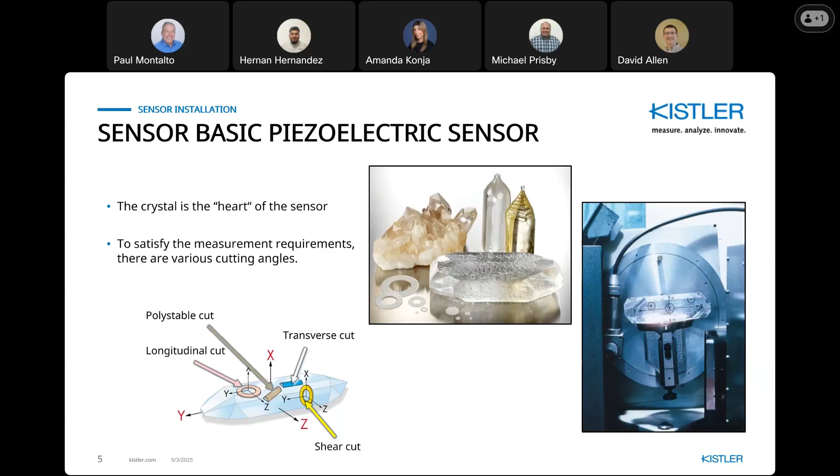Let's start at the beginning with the structure of the sensors. Kistler is a sensor company, and we basically use piezo technology, which involves forming sensors from crystals by cutting different shapes from the crystal in order to get the desired properties of output from the sensor. Essentially, when crystals have force applied to them, they give off an electrical charge naturally, and it's linear to the amount of force being applied to them. So it's a natural born sensor material, quite honestly. We'll see more of how it works in just a second here.

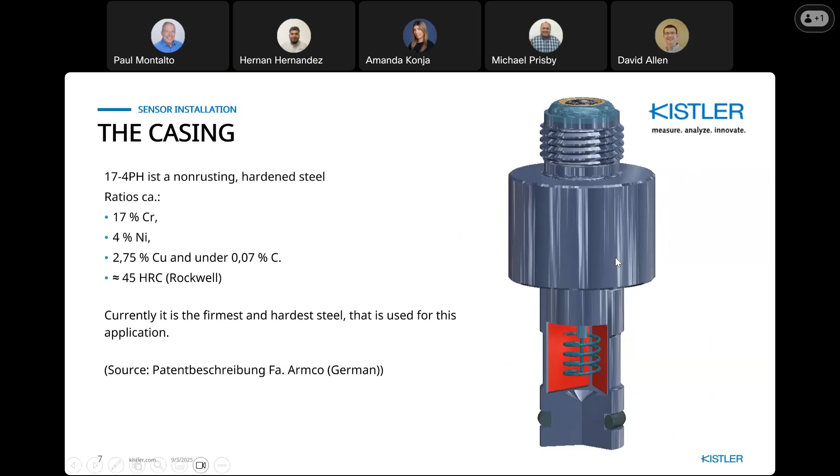The basic frame or cylinder of the sensor is high strength steel, such that it protects the crystals from any kind of damage. Inside the sensor, looking at the cross section, you'll see there is no electronics. You just have the crystal cartridge and insulating details to allow that electrical charge to be sent to the connection cable, which will eventually go to an amplifier and a monitor screen so that you can see the pressure output.

Essentially, the sensor is mounted in the cavity and senses the plastic flow as the plastic pushes against the tip of the sensor during the filling process. As we know, or may not realize, the filling process in most cavities is generally less than a couple seconds. So this plastic is flowing and this pressure is being sensed almost instantaneously. That's the basic construction of the sensor.

The types of sensors we have to look at industry-wide are direct sensors, which are mounted directly in the cavity; indirect sensors, which are mounted typically behind an ejector pin or a stationary pin; or a third category, contactless sensors. This is a sensor that's essentially bottomed out into the backside of the cavity, using the cavity steel as a transmission source to get the plastic pressure felt onto the tip of the sensor.

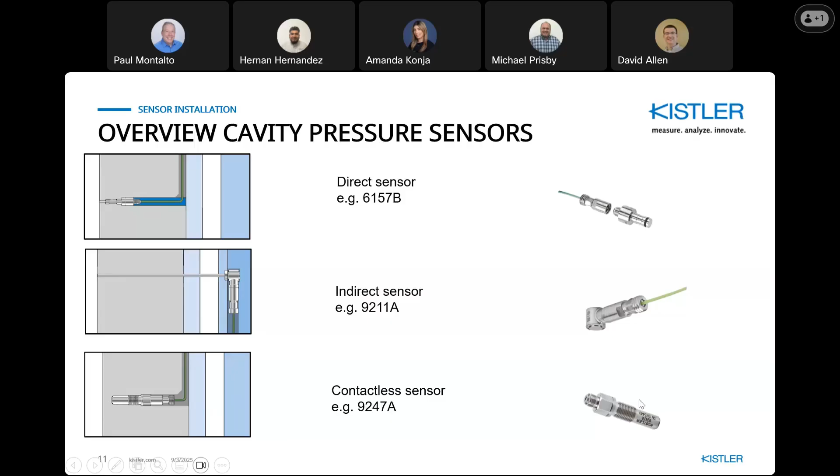Each type of sensor has some advantages and disadvantages. The primary advantage of the direct mount is that it's right at the source of the plastic pressure. One of the disadvantages is that it does leave a witness mark similar to an ejector pin on the part. In the event that that's something we have to work around, we have some other options.

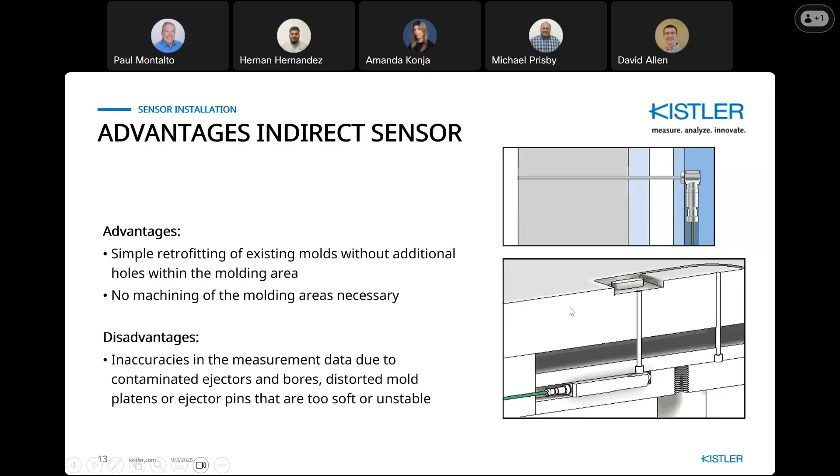The indirect sensor mounts behind an ejector pin, as I described. It generally is very easy to retrofit into an existing mold, and that's why these are extremely popular when we're looking at upgrading existing factories to get them into modern molding.

Quite an innovative design here is this contact-free sensor, where, if you have a lens or any kind of surface that cannot have any blemishes, or is so small that a sensor would not fit on its surface, this contactless sensor is great for micro molding, silicone, or even lenses where imperfections are not permitted by witness marks of any kind of pin.

So just a recap of the different types of sensors. In addition to sensing pressure, we could also add a thermocouple to the tip of these designs, making it a pressure and temperature combination sensor.

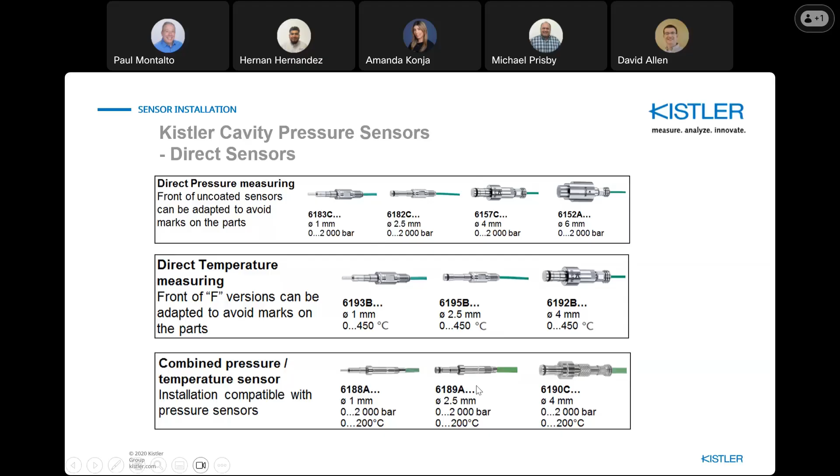Coax options are also available in the event that the cabling is routed outside of the mold.

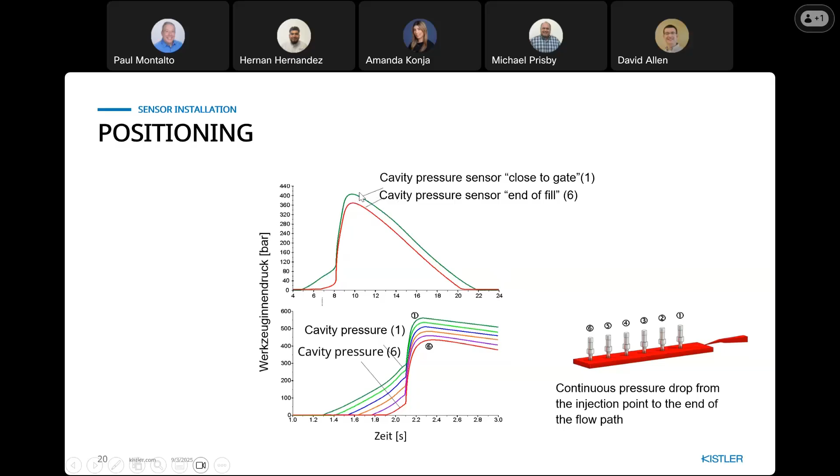Where we put the sensor in the mold will determine the type of graph you will get. The closer to the gate, you'll see a higher pressure, essentially a filling portion of the graph, versus at the end of fill, represented here in the red line, which is a smaller pressure due to the fact that the plastic pressure is actually dropping between the filling point and the end point, because plastic is always curing as it's flowing in, so you're losing pressure as it's curing. Even though it's only 1 to 2 seconds, this is an amount of pressure that's also being lost.

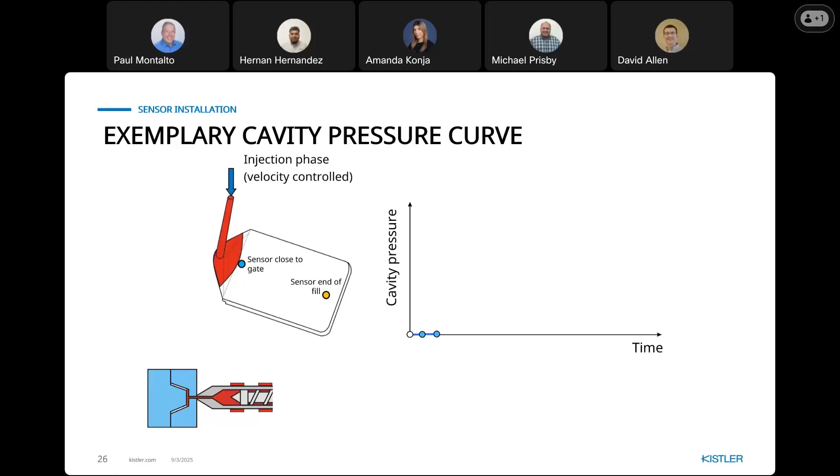Just a bit of correlation of how plastic flows into the cavity and the associated graph. As soon as plastic touches the sensor, you'll get movement on the graph, and as it's filling, you'll get a constant upward curve.

The end of fill sensor here, noted in yellow, you just get a little mark that the pressure is there. You don't actually get any pressure until you get a full cavity. As soon as the cavity is full, that's when the pressure spikes up, because there's nowhere else for the plastic to flow but against the walls of the cavity, thus giving you the spike in pressure.

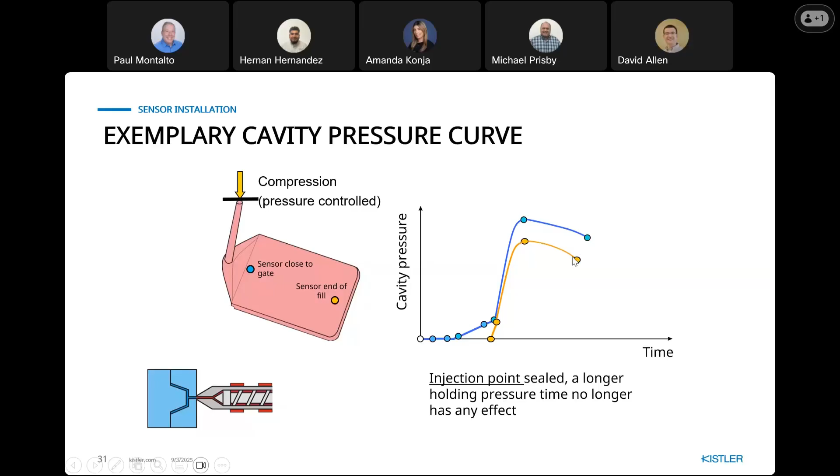Further along the timeline, you see the graphs will start to descend. That's due to the plastic curing. And as the plastic cures, it shrinks away from the sensor, it shrinks away from the walls of the plastic, thus giving you the cooling rate of how the part is actually in its cure stage.

And finally, as the mold opens, the pressure is essentially back to nominal before the process started. So using this graph, we can verify and correlate to dimensional results and capability studies, and the process monitor system can monitor independently from the molding machine the different process settings.

Just another comparison, showing you the difference between post-gate and end of fill. Post-gate sensors are really good for controlling different aspects of the process because it's closer to the filling point. End of fill sensors are really good for monitoring part quality, as it's specifically in line with correlation to the cooling process and the pack and hold process, which allows for dimensional stability to be maintained.

As we talked a little bit about pressure loss between the injection machine, here represented at the top graph, these are the different steps of pressure due to the plastic curing as it's being pushed through the mold and essentially setting up. This is a typical graph you'd see for the different types of pressures, and this is why it's much better to rely on cavity pressure than the molding machine's injection pressure graphs.

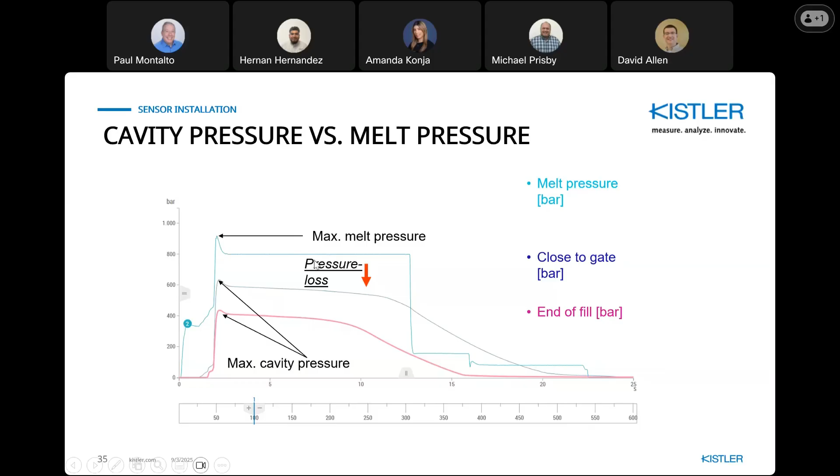The process monitor, the Comoneo, is what these sensors are connected to, and it comes in a version of 8-channel, 16, and 32 channels. So you can have a variety of different connections to this monitor system.

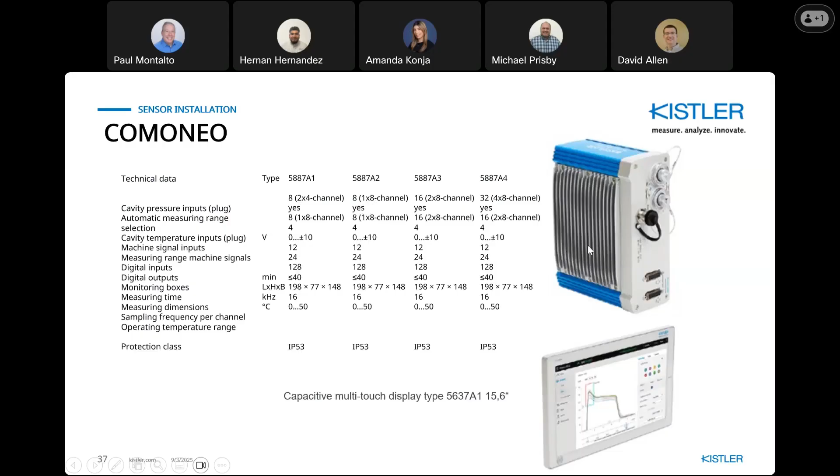This is kind of a busy screen, but it's showing all the different influences, or all the different signals that can be captured and recorded on the Comoneo for process integrity. So you can have history of how it's been running, or troubleshooting, or process development.

And you could see here briefly, the types of curves that are being produced from the cavity pressure sensors. You have the molding machine input can be graphed. You can have the temperature of the cavities. You get a whole snapshot of the entire cycle.

And in this case, you have a timeline on the bottom. It looks like it's 0 to 13 seconds. And so you have a history being recorded here.

Again the correlation of the graph to the different types of product defects that you may want to prevent. With the monitoring system, you can choose to select what's going to be a good part and bad part before the molds even open.

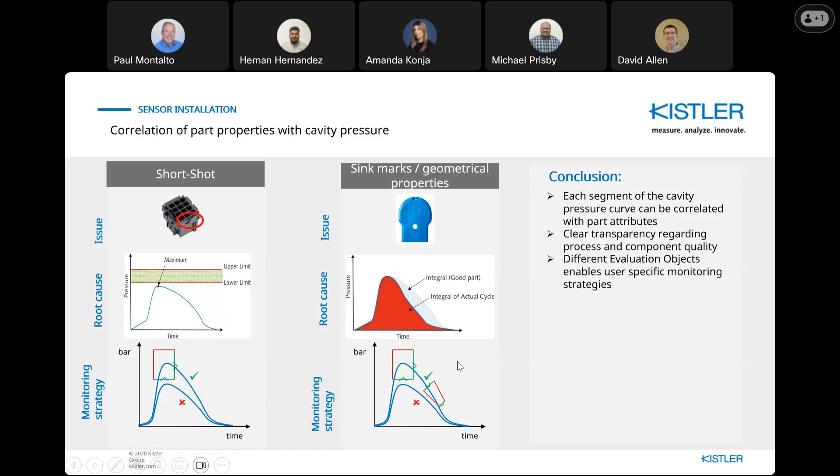Represented by what we call this evaluation object here, the red and green box. If the pressure curves are in the box, that would be an acceptable condition. Looks like 2 cavities are under the graph, under the box, and so these are designated as not good parts, and so they would be separated by your handling equipment, whether it's a robot or an offloading machine.

Control of the process is actually also introduced by the Comoneo by determining when the switchover point is, so you could switch from fill to pack. The Comoneo is equipped with both a manual and an automatic version that you, the user, can set so you don't rely on the molding machine's position switchover. You can use the actual cavity pressure to do the switchover.

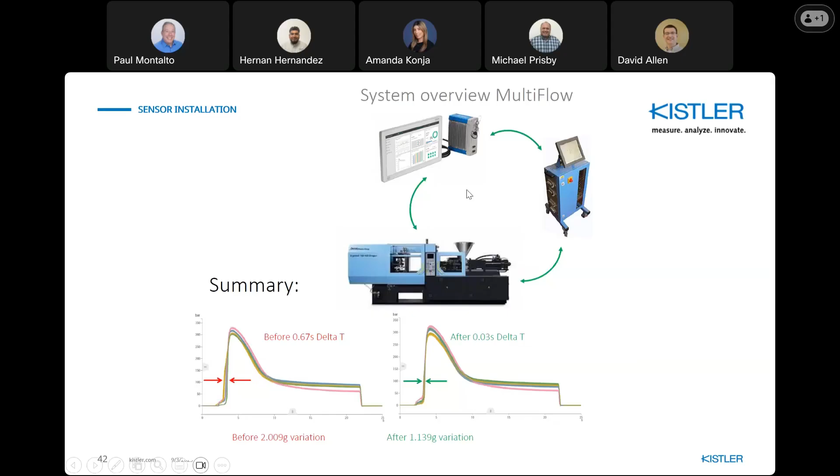Another form of control that the Comoneo offers is it can take over the hot runner controller tip temperatures if you're running a hot runner tool, and it will adjust the tip temperatures in order to balance the filling process. And it does that automatically on each shot with an onboard algorithm.

Connecting multiple machines to a common system so that you could see the status of your whole plant is easily obtainable. We've got the software that communicates with the Comoneo and then displays to a common network location that all the users can have access to see what the status of each process is, and then also go back in the history to however long you need to go look back.

This is essentially plastic processing, and some of the basic and most used concepts within the system.

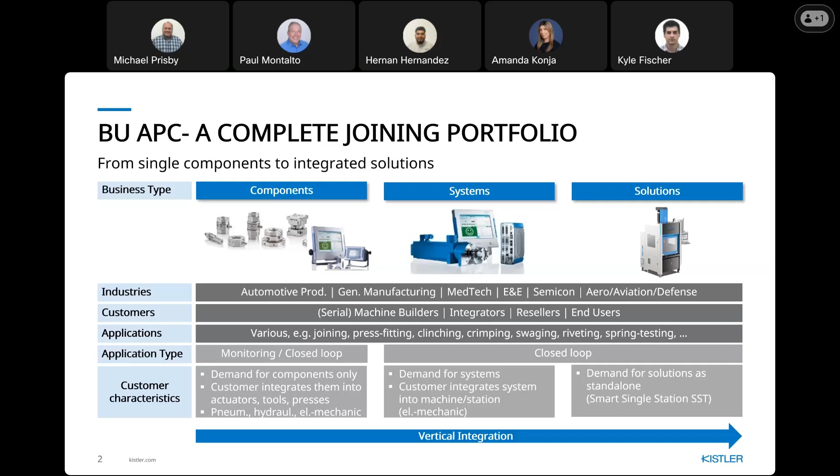So Mike already went over the piezoelectric effect of when you compress a crystal, it outputs a charge. So the advantage of the Kistler piezoelectric sensors is that we have multiple varieties based on those different crystal cuts, but it allows you to have very small compact sensors that have wide measuring ranges.

The other advantage too is since you have that wide measuring range and a very linear output from the sensor, it gives you rangeability. For example, you can use a 50 kilonewton sensor, but it also comes calibrated at 0 to 5 kilonewtons and 0 to 500 newtons, so a 100%, a 10%, and a 1% range with the same linearity and same accuracy for each of those ranges.

So you can use one sensor for multiple applications, or you can oversize the sensor to make sure you don't damage it, but also get the resolution and accuracy down at the low end.

The sensors have great durability because they have stainless steel and you are compressing a rock. So you have long-term stability of the sensors that can last 30 plus years, 15 plus million cycles, and you never have to worry about damaging them unless you are using them in the wrong way or subjecting them to environments that are outside of their spec.

With these sensors, the best measurement is your direct measurement, directly in line with whatever product you are assembling or testing. Then we have a couple other options too, which would be your shunt measurement, where it would be below in the steel underneath the part, where you're collecting say 60 to 80% of the force that is traveling through the part.

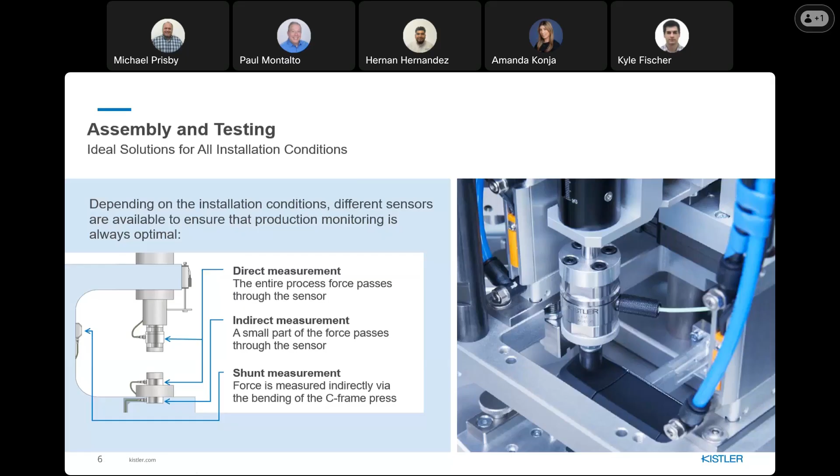So again, you can either do a calibration on this to directly correlate your force with it, or you can correlate a good versus bad part based on the output of that strain from that sensor. So the advantage is that with the sensors, we have multiple options of where you can install them.

So the advantage is that we can do rotation just for speed, or we can do rotation versus angle. And then again, with some of these sensors, we can do multiple calibrated ranges on them, so you can have an oversized sensor but also get the accuracy down at a lower end as well.

So then we can also use those sensors in some of our process monitoring solutions. You can retrofit old hand press type stations, or you can go to our other process monitoring solutions and be able to do basically just any XY plot, for example.

So you can do pressure versus time, like Mike showed. You can do force versus displacement, torque versus angle, force versus time, whatever the two components you want to plot against each other.

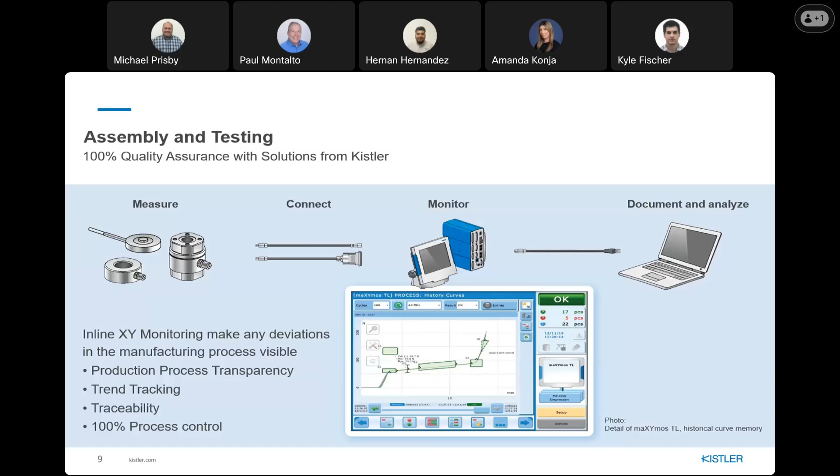This is where the production monitoring systems and force sensors are all used. We use them inline, end of line, and also offline. So at the bottom left, you have your force sensor and a displacement sensor going to our process monitoring system.

The advantage of actually using the process monitoring system versus just using the analog or digital amplifiers where the PLC does all the determination of good versus bad part, is that you're getting more data that's being stored and collected, and you're also getting immediate visual and digital feedback.

So you're actually seeing the process happening, but you're also having that signal go over field bus to your PLC, which is also storing, analyzing, and determining if that part is good or bad based on your own criteria as well. And it's a simple interface.

It's easy to set up and easy to use. Basically, if you can learn how to set up an iPhone within an hour, you can learn to set this up in an hour also.

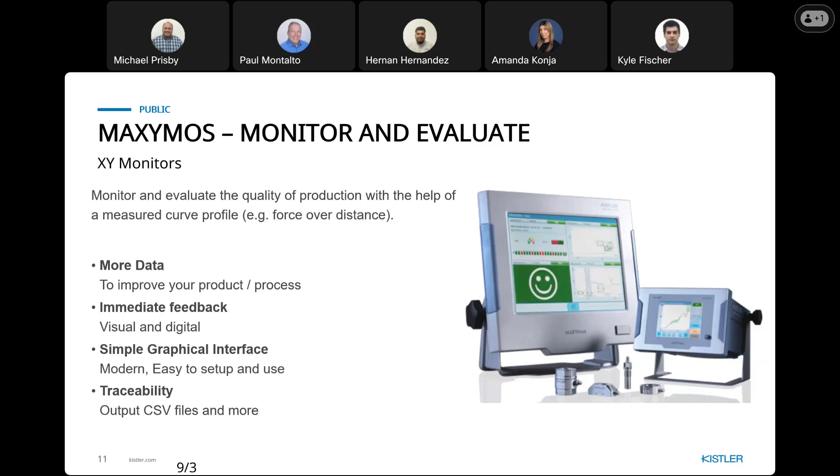And then there's traceability, storing all your CSV files, up to 5,000 on board, but it's also outputting every one of those CSV files every single cycle. You can also send them to different folders on your server based on shifts or batches of parts that come in, so you can organize that data on your end in your server as well.

Some of the options we have for the maXYmos: we have our standard one, and then we have a medical version, which is Part 11 compliant for your data export, and also tracks any user changes or login changes done to the unit. So it's FDA compliant.

We also have our maXYmos BL, which is our basic level unit. If you're looking to retrofit a station and just want some type of visualization into your process but don't need all the bells and whistles of the one on the left, that works. Depending on the application, we can go in and recommend the best solution for you.

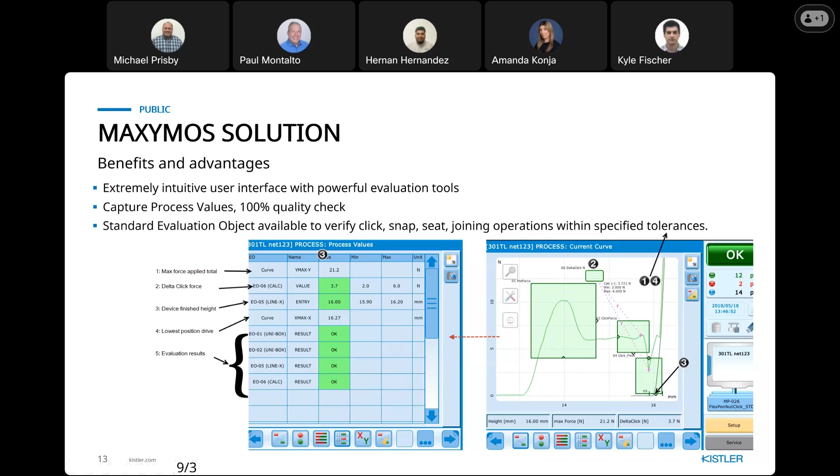Some of the applications where these sensors are used would be card switch testing or testing of probes for semiconductor type applications, or check valves. Just any type of simple assembly where you just need some type of force feedback to know that your part is being tested correctly and that your process is being verified.

Next, I'm going to go into the joining systems, which is basically taking your sensor and your XY monitoring and putting it into a complete package for you.

The electromechanical joining systems, again, used for a lot of the same applications that the sensors are used for, but you're getting complete control over the process because you have the electromechanical joining system that you're telling where to move and what speed to move.

Used in every industry from automotive, the classic ICE engines, transmissions, and turbochargers, to electric drive units and batteries, all your pump, steering, and brakes, and again your medical insulin pens, white goods, power tools, electronics, any type of assembly or switch testing that needs to be done.

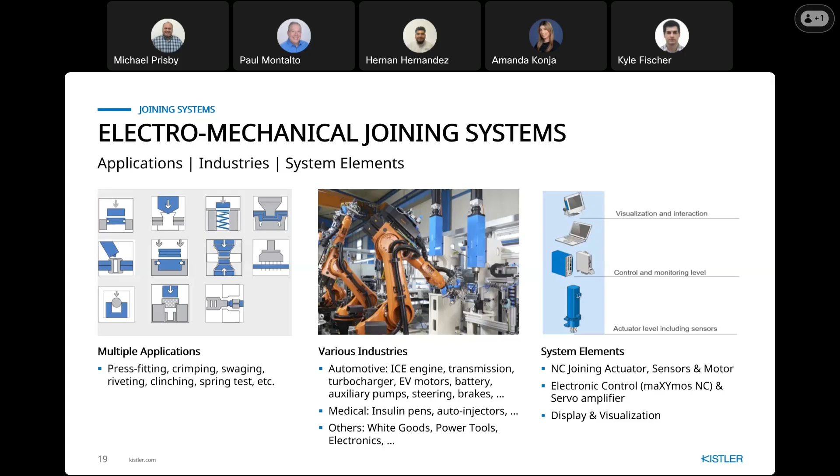The advantage with our maXYmos system is it's a common family. So when you know how to use one, you know how to use all of them.

So it gives you the advantage of flexibility for your press fit operations. And then it also makes it a lot easier to install because there's no configuring of anything, no putting multiple components from different suppliers working together. There's lower maintenance because all you have to do is essentially grease the unit.

And then obviously you have lower energy consumption if you're using electrical systems versus air over oil or pneumatic. There's no pumps, there's no leaking oil, there's no air pumps, there's no fluid disposal, no seals breaking and stuff leaking and cleanup and all that other stuff that comes with it.

So the elements of our joining system, our servo press system, essentially you have the press module, which has the motor, the force sensor installed, and then the absolute encoder installed.

The IndraDrive, which is the servo amp, along with the safety zone box, so all your safety wiring, so your e-stops or your light curtains or anything like that would be wired in your safety zone box. Or if you have a safety PLC, for example, you could wire that directly into the safety zone module.

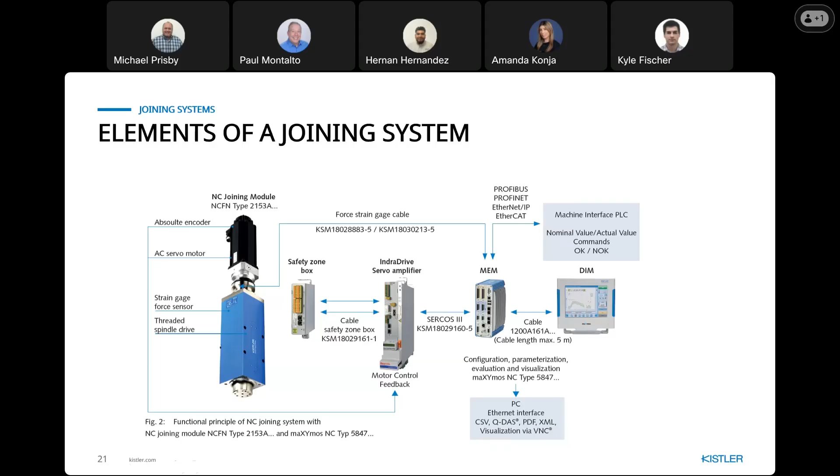Which is what we'll go into here. So you have your base layer products up here at the top, the maXYmos system, the drive, cables, and you have your servo press.

The joining stroke where the two parts are being put together, say pressing to an 800 Newton force. You don't want to measure any more of the curve. You retract to your home position, that's your sequence.

The advantage of controlling the process with servo presses versus just monitoring is that you're actually controlling the process. You're controlling the speed at which you're assembling the parts, and the forces you're applying, and you can reduce your cycle time with different speed settings because you're not moving only at one speed.

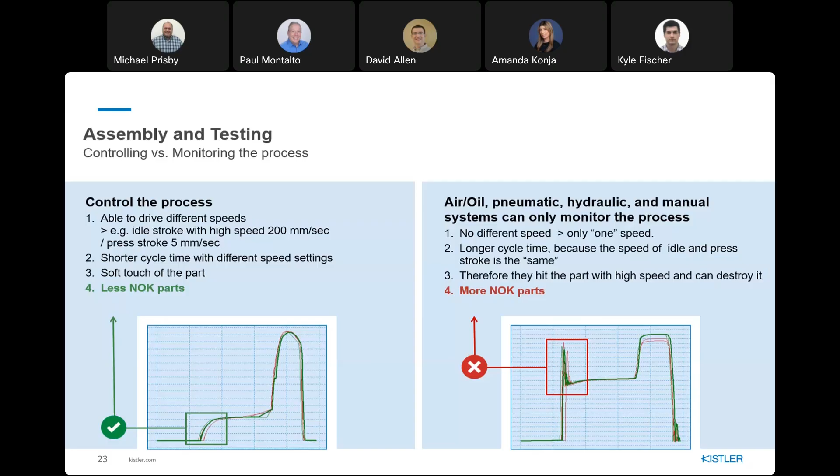Some of the other applications we use the servo press systems with are transmission assembly, engine assembly, valve seats and guides, fuel, oil, and water pumps, things like that. Also chassis assembly, electric power steering, or sensors used for radar on cars for blind spot monitoring and things like that.

Also general industry, from medical device assembly, auto injectors, electrical assembly like PCB boards being pressed into plastic housings. White goods, for example, the spin tube for the old school washers in the middle that you stuff blankets around. And also other industries like spring testing, for the elasticity of the spring.

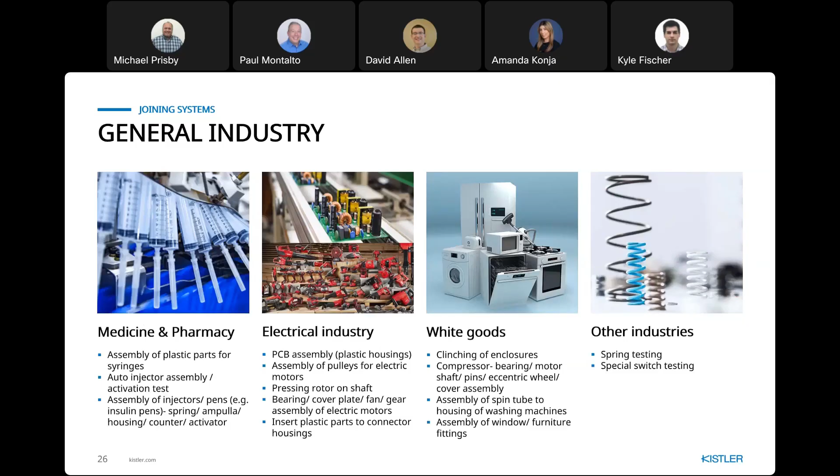So the benefits of using the ServoPress systems: one, reduction of CO2. There's a global push to reduce carbon emissions, usually a corporate push, but you are reducing overall CO2 output as an advantage. Two, you're also reducing your total cost of ownership.

The cost of using an electrical joining system versus hydraulic is 10%, because there's no pump. The only thing you're using is electricity. There's no pumps running all the time, no other oils that need to be shipped in and out, and less maintenance needed on that product. And then three, reduction of NOK parts, because you're controlling the process versus just running, say, a hydraulic actuator at one speed.

So the portfolio we have covers everything from 50 newtons all the way up to 700 kilonewtons, so depending on what the application is, we have a fit. For example, the low force range is the NCFT, the top left one here. And if you're chasing cycle time, the NCFH has advantages because it has a hollow shaft motor design, so we can achieve much higher acceleration and deceleration speeds along with stroke speeds.

If you need a custom stroke length or very high forces, our NCFN model is the one we'd go with. Or if you need an economy model, where you're trying to compete with what you already have on the floor, your customer wanting to use air over oil or a pneumatic press, we have the NCFE, which is much more economical price-wise. It has more limitations on what it can do, but if that's what you're competing against, we have that option. And then what I'm going to go into next is what we're officially launching next month, called NCFQ.

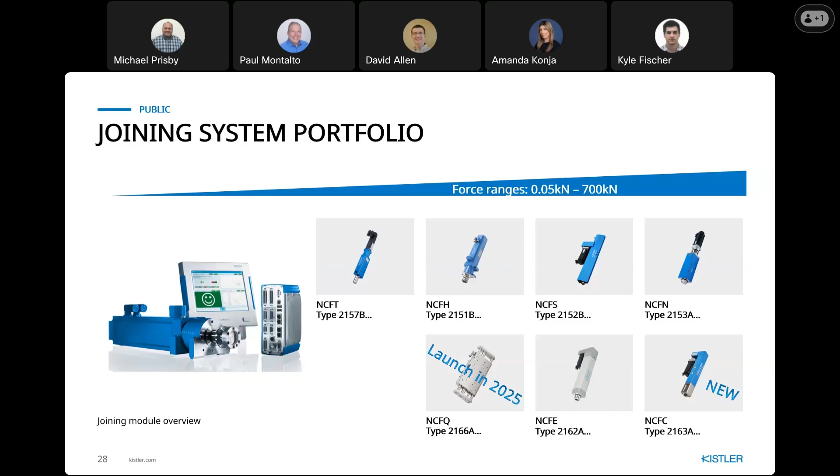So Kistler partnered with Linmot, a Swiss actuator company. Basically, with what customers were doing before, maybe using Linmot, they were doing all the programming in the drive, and hooking up our process monitoring systems to it with a force sensor, for example. So now what we have is the Linmot drive will communicate directly with our maXYmos NC system, just like our ServoPresses do, so you're setting it all up just like a step table.

So then it's for low force ranges, from 0.1 to 500 newtons, in stroke from 60 to 700 millimeters or so. But the idea is the speed is much faster, up to 5,000 millimeters per second, which a standard ServoPress type design can't achieve.

So with these, they're also ISO 4 cleanroom certified, which helps getting into certain applications where, say, a ServoPress with grease or things like that being evident isn't possible.

And then with this, we've also come out with a new product this past year, our ICAM-B. It's basically just a simple charge amplifier, but what it can do with this option is let us hook up a force sensor and one of our accelerometers to it, allowing you to do acceleration compensation. So as that Linmot actuator is moving up and down, you don't have to adjust speeds to slow it down to make the curve look more correct. You can basically cancel out all that noise from the large tooling moving up and down.

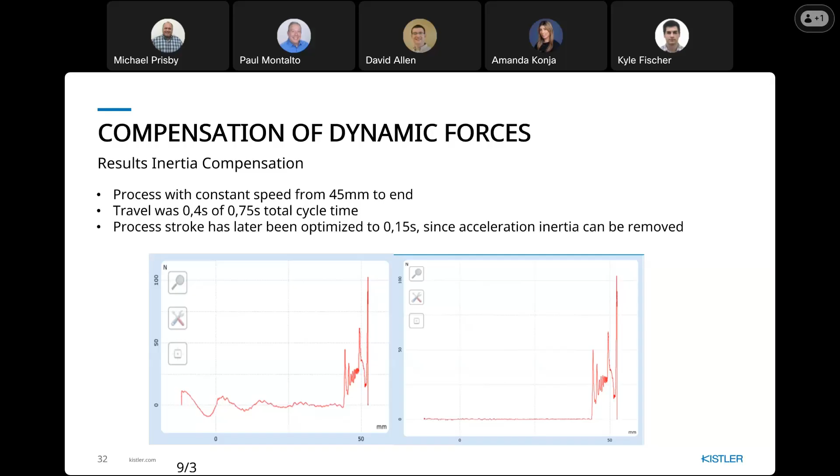Lastly, taking all those things together for a complete solution that we provide - we call it the Smart Single Station. We're using our servo press systems, our controls, all our know-how from Kistler, and all the applications we've worked on in the past, building a complete station that we can supply for product development or offline testing. You could essentially use it as part of your assembly line, but it's not really our main idea to compete with machine builders. It's more about offering a complete package rather than you, the customer, buying a bunch of components and doing it on your own.

One example we've done with this is a customer in Europe developing new, more sustainable packaging for coffee capsules with different materials. They wanted to do this on their own, so we offered the entire package, helping them build it in-house with design ideas and different specifications they could try. They ended up going with our solution. Again, it's not full production - it's just a simple lab type press they can use for development and design.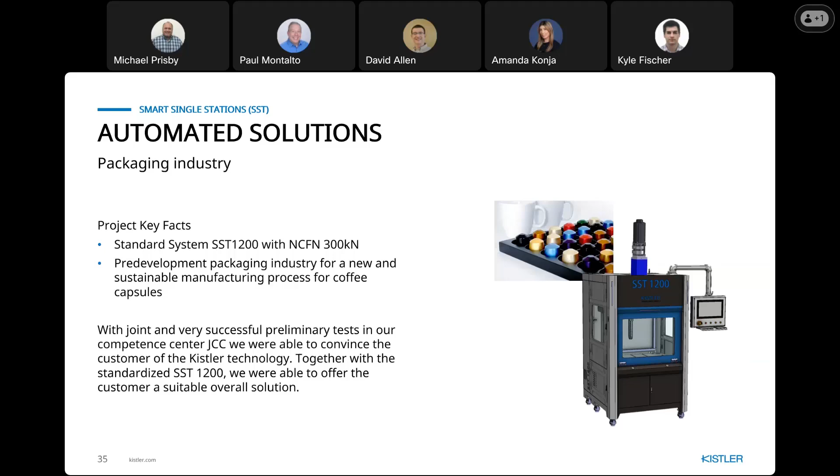The main thing is we offer everything from just components so you can retrofit stations, or you just need simple force and time feedback to an amplifier, or you want to just monitor the process if you already have one in place. You might want to add a sensor and a displacement sensor and run it back for live XY feedback and data output - versus maybe you don't have anything at the moment, or you're using a PLC to do the analysis. With our systems you get much higher data analyzing rates, 5 kilohertz up to 20 kilohertz on some units for analyzing your process curve. Taking all those components together, we supply a complete system you can use for your assembly process, and finally a full solution you can use with all the know-how that Kistler offers.

So where our systems are, we're doing quality monitoring in line, in the production process, right after the metal forming. In this case, the stamping line, you would see the system directly right after the stamping process, and we're inspecting 100% of the parts coming out of the stamping press. We're doing dimensional inspection - some metal form parts have strict tolerances, and we could do 100% inspection of these dimensional features.

But we could also do surface inspection. Let's say you have certain stains or scratches on the surface level - we would use a color camera for something like this. We could also do a 3D measurement, to now do a Z measurement.

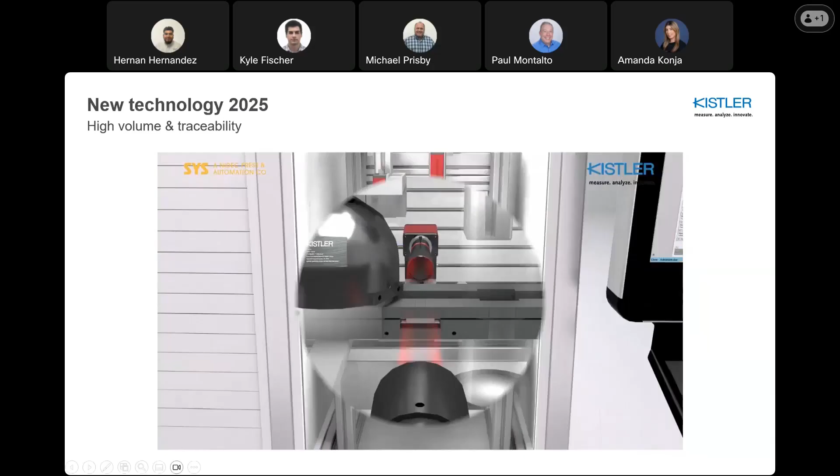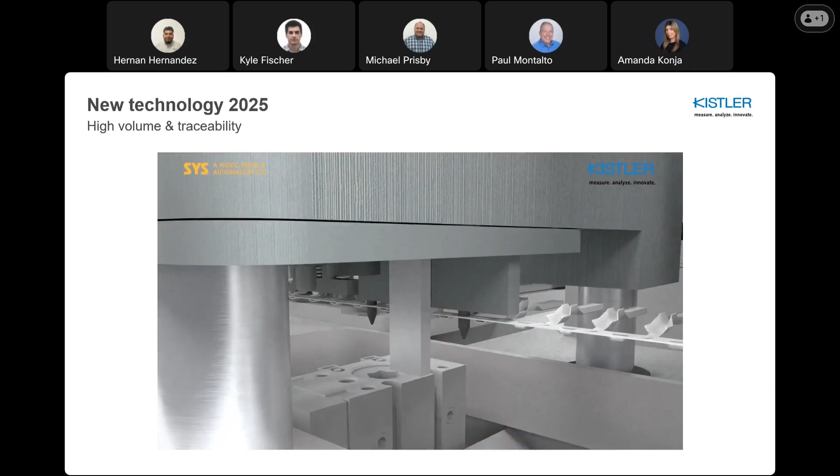And how that looks is, here's a rough video - hopefully it transmits well. So this system here, we're using our camera systems. This is our interface, this is what the user would see. A part is now flagged as a non-compliant part. The part is then fed onto what we call our stamping solution. So the part is stamped out of the reel because we want to eliminate any escape features or any containment issues - the parts are removed out of the strip.

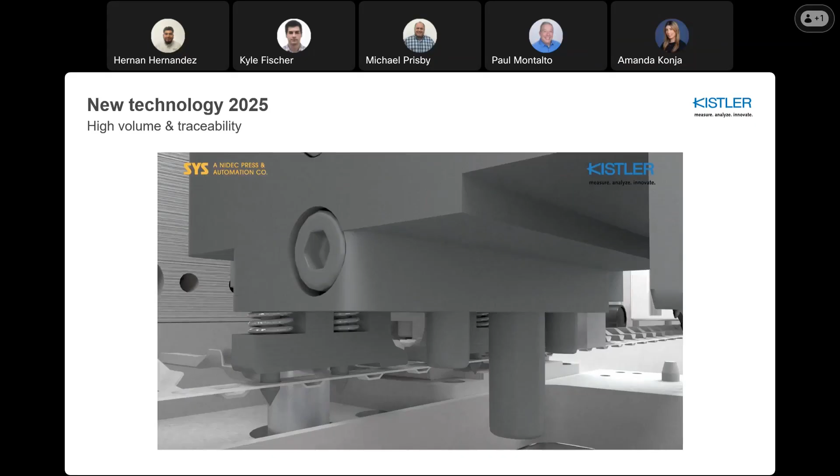Because some customers have a downstream process that does not allow a gap in this reel, we're going to re-weld the strip back together, eliminating the gap left behind by removing the bad part. We're doing this all in real time. When the press is running about 1,000 strokes a minute, this is the solution that Kistler is offering.

And what Kistler is, is the interface itself - it's the software. We do use third-party vendors for our cameras, our lensing, but the real Kistler solution is the software - what is grasping the data, what is collecting this data, what is illustrating this data to our customers. And here is an application example of an alphanumeric code on the part itself.

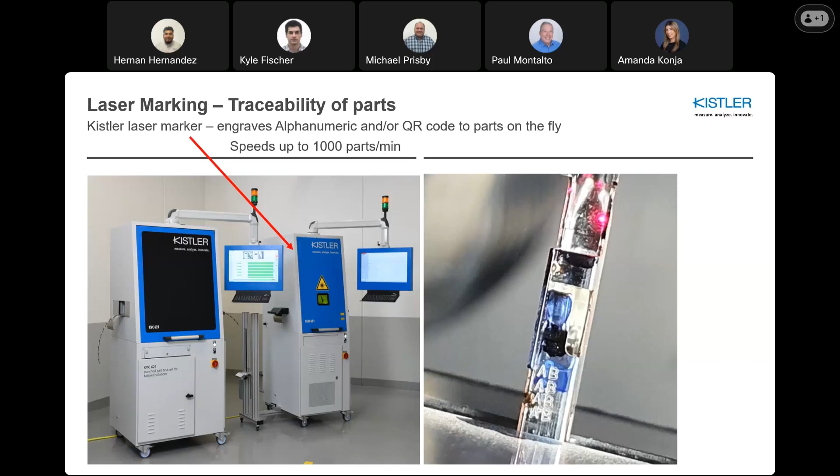With this laser marker, we're limited to 1,000 parts a minute. And then I'll showcase some of the applications that we've done these past years.

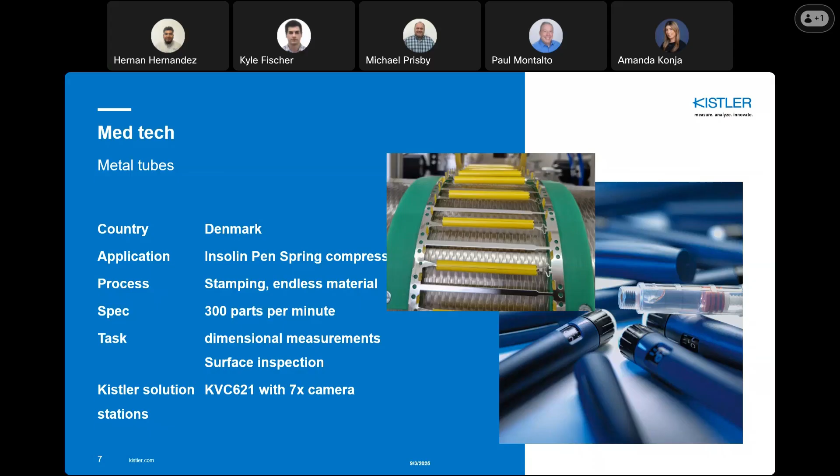And then another application we just realized in Denmark - this was for another reel-to-reel application. These are the spring compressors that are inside the insulin pen. Again, we're doing dimensional inspection, but something unique to this application was that we're also doing a surface inspection to see if there's any contaminants on the plastic that's overmolded here.

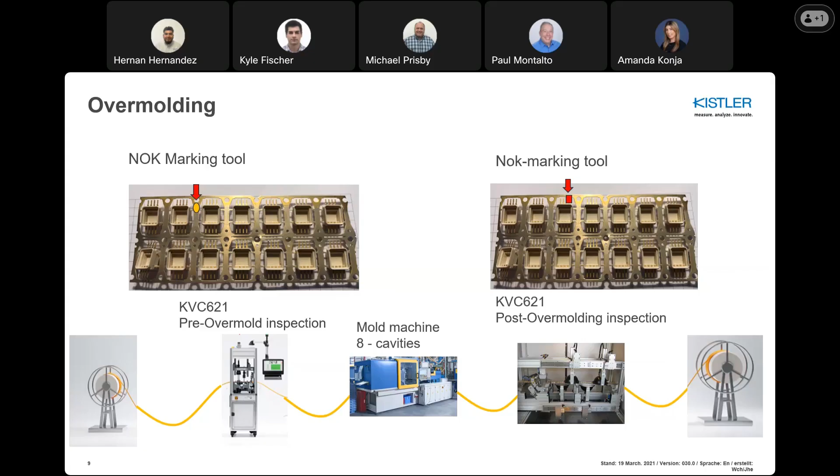But we're also in the overmolding world. So we would integrate a vision inspection solution right before entering the molding machine based on the results our imaging system shows. If there are any damages to these contact pins, we would communicate with the molding machine, tell it there's damage to this reel, index to the next set to prevent any tool crashes. But we would also do a post-overmolding inspection to make sure there's no short shots, no flash, or any bent pins due to tool wear.

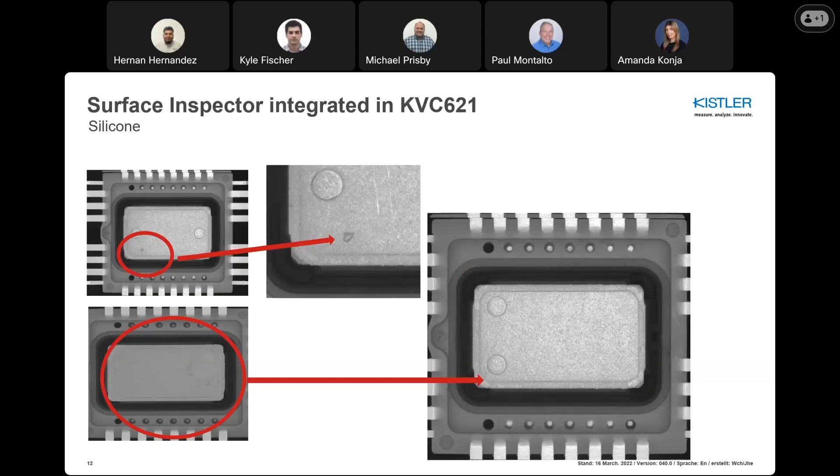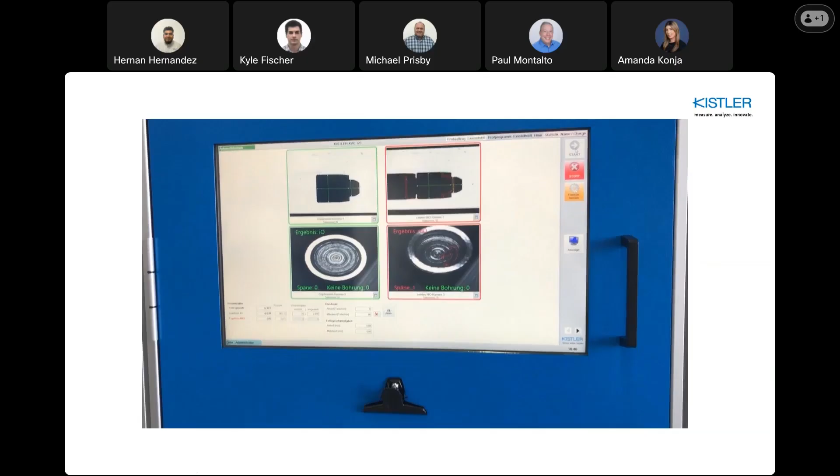And for singular pieces, now we're not talking about reel-to-reel. We have the 121 solution, so you would feed singular pieces into our machine. Here we're making an inspection on turned parts, using a mechanical feeder to feed the parts into our imaging system. It's a bowl feeder that would orient the parts and then feed them onto a linear conveyor, which would then feed it onto our camera stations.

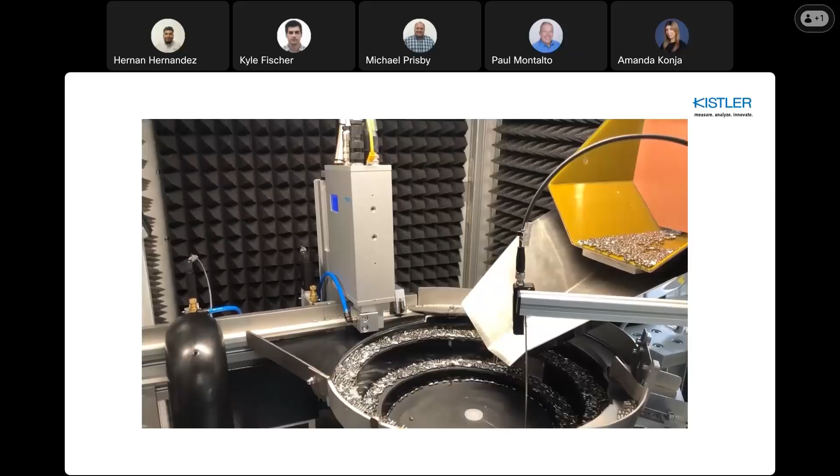You can see that some of the parts are blowing back into the bowl feeder. That's because the orientation is not correct and/or the parts are placed incorrectly. And so now the linear conveyor will feed the part onto our camera station.

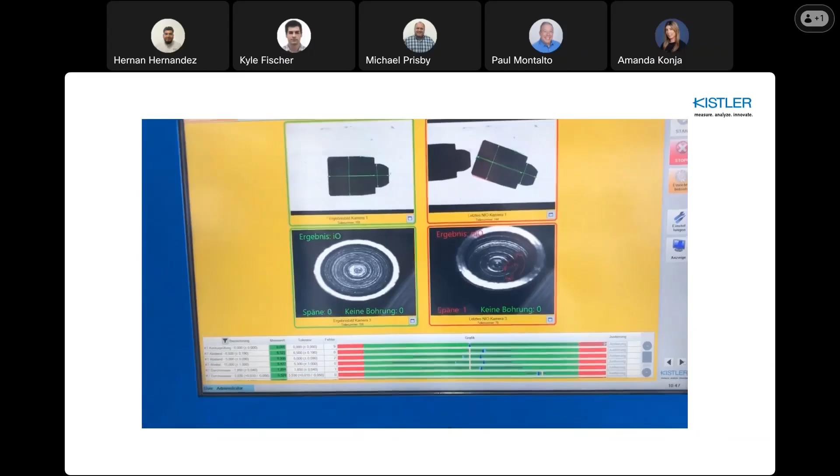Our interface showcases a parts counter. So you would see a total count of parts being inspected, a parts counter for good parts, and a parts counter for non-compliant parts.

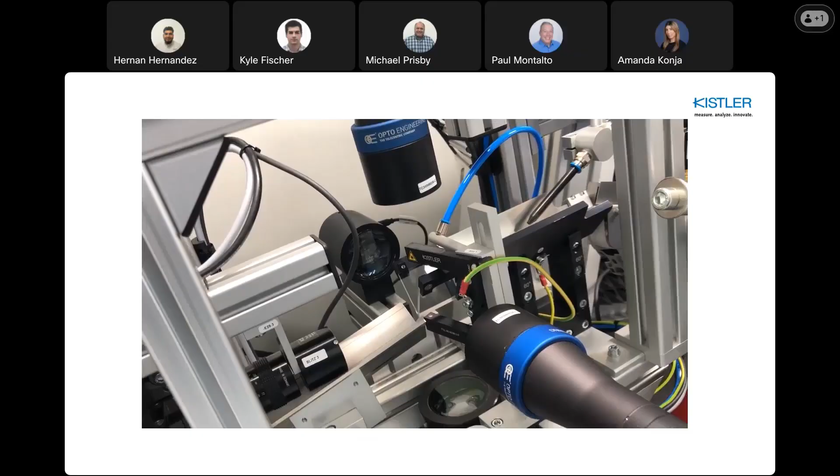So here is our camera station. You see that we're using a two camera solution, and as the part is free falling on this rail, on that small 3-inch window is where we're capturing the images of each part. Then based off the results of our imaging system, we would sort into either a good bin, where all the parts are good, or a non-compliant bin, isolating the bad parts.

There you'd see the mechanical actuation of this divider that's separating the non-compliant parts.

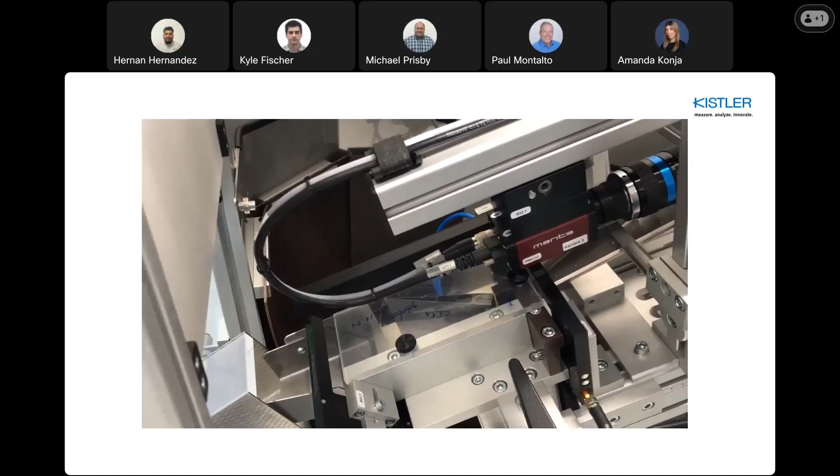And what's neat about this solution is if you have a family of similar parts, it's very easy to do a changeover and switch over to the next set of parts to do inspection on multiple family of parts.

But part of our capabilities are also 3D measurements. So as I spoke earlier, if we want to do a Z measurement, let's say a flatness measurement or a coplanarity measurement, then we would use laser triangulation to do Z measurements.

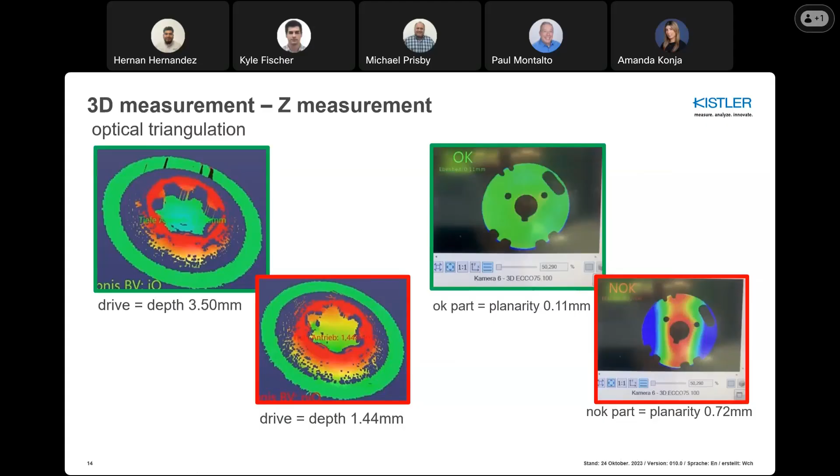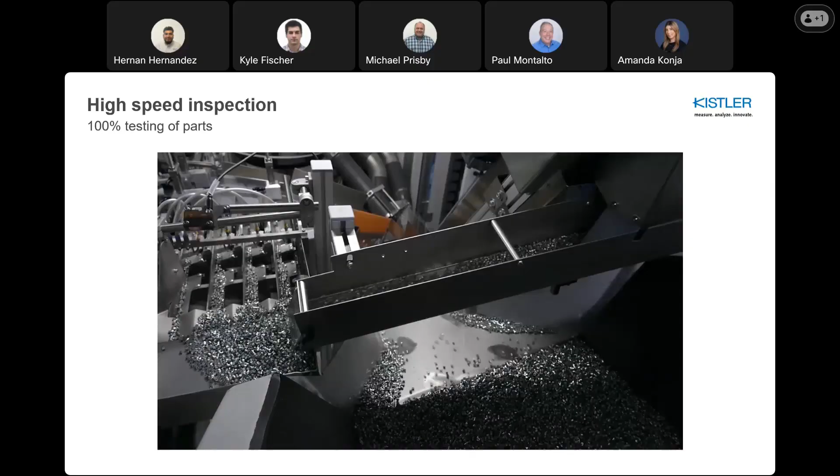And here I will showcase a high-speed inspection. This is for the fastener application. So now we're moving into an 800 series, which is really ideal for high volume throughput. When throughput is required, then we would use a system like this. It's a glass table, and we're doing speeds up to 700 parts a minute.

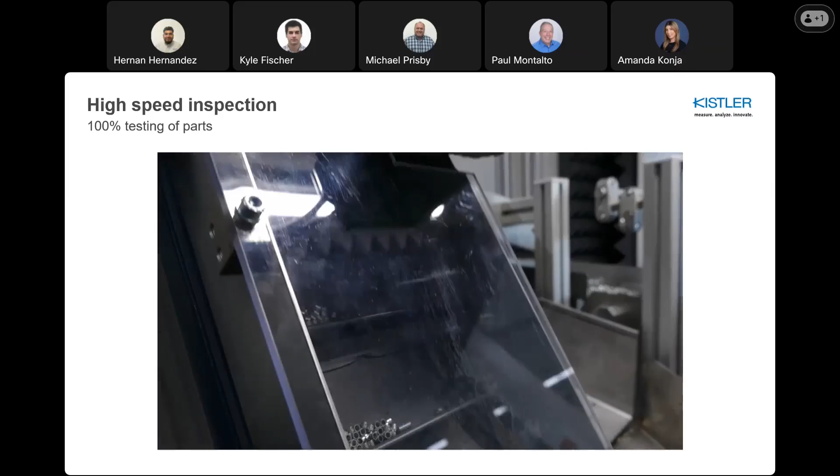See that we used a custom feeder solution here with the belt-driven feeder. And because the customer required a high throughput of this inspection station, we're using multiple channels to feed into our glass table.

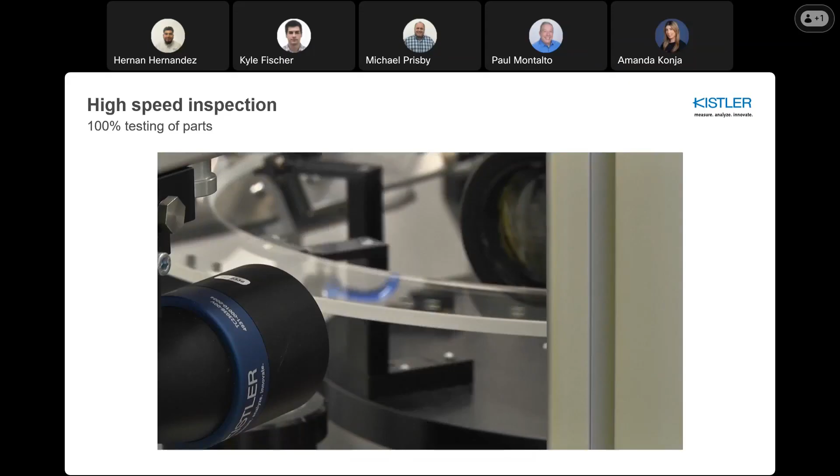So what's neat about the glass table is that since it is transparent, we are able to do inspections on the top side, bottom side, side view. This gives us more versatility in the angles that we can do inspections.

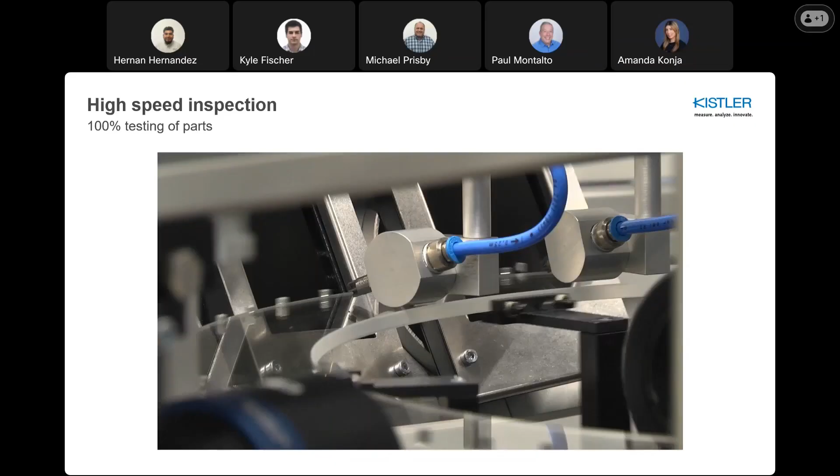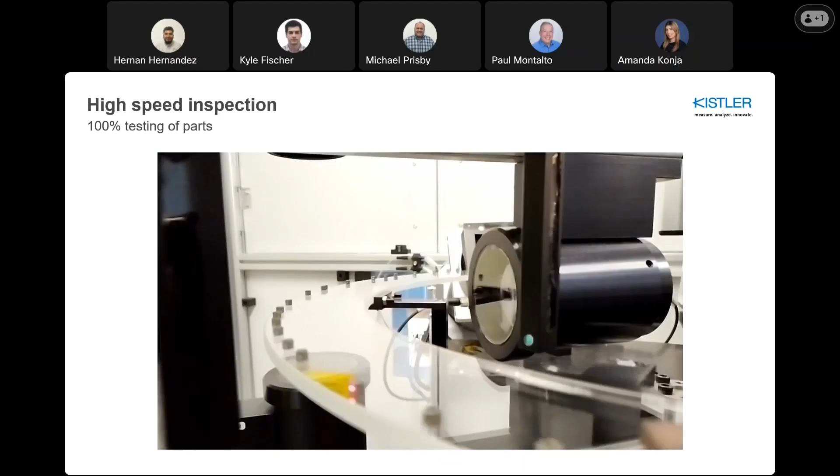Here we're indicating how we're using the high pressure nozzles to blow the units into the correct bins. In this case, you see that red indicator that will blow the parts that are non-compliant into its individual bin.

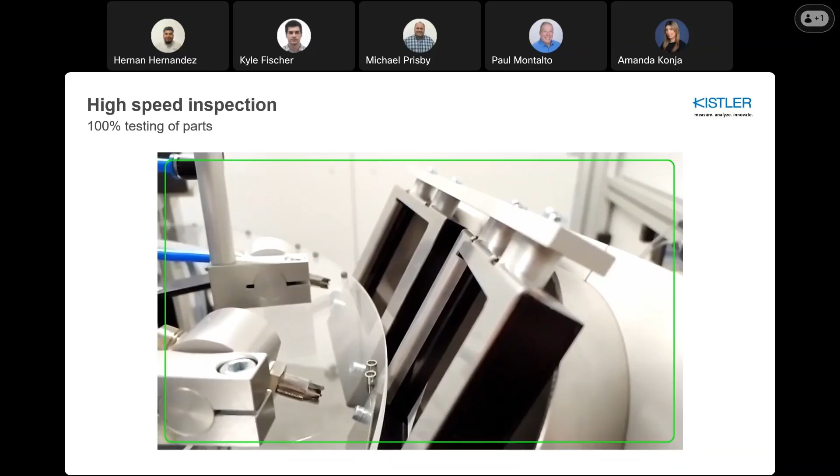With the glass table, we have the ability to have up to 4 sorting bins. Let's say there's a second or third priority where you have parts that could be reworked, for a plastic component. Based on that feature, if that fails, we can isolate it into a rework bin.

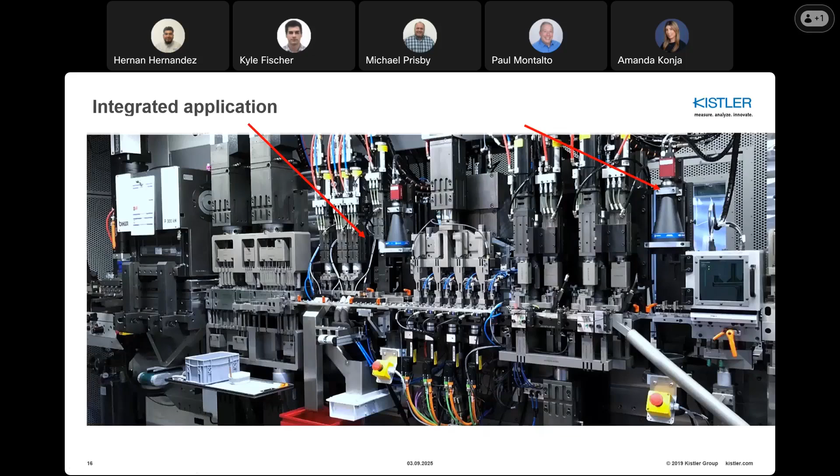Lastly, I wanted to touch base on integrated solutions. Let's say you have an existing assembly line or production line, then we could also integrate our solution into this existing production line. Here you could see our camera stations being integrated into an existing assembly line.

Similarly, let's say you're doing a molding process and you want to do post molding inspection. We're working with the end of arm tooling to present the parts to our camera station. In this case, we were doing a coplanarity measurement to see the effects of the cooling post molding process. So, thank you guys.

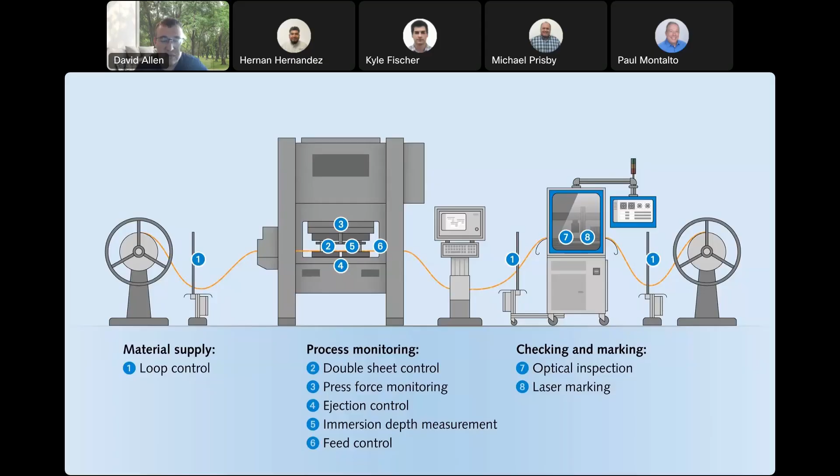We have fork light barriers used for double sheet control, double thickness control and detection, where you can mount a piece on the top plate and detect if it's fully closing and clamping down with the bottom plate. We offer them with a digital output, and a similar version with an analog output for a bit more control.

We have frame light barriers for ejection control, making sure a slug has been properly ejected. The loop control sensors make sure your feed rate is correct, not getting too tight or too loose, and then some contact sensors for presence control.

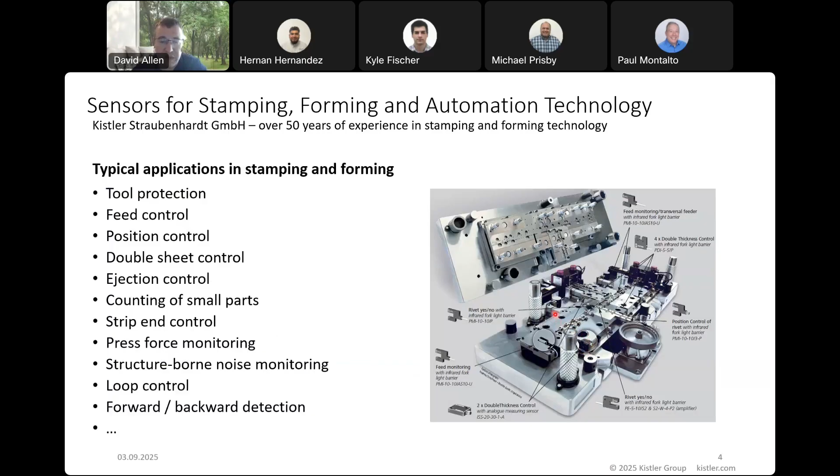Here's an overview of a typical stamping die where we would find various positions to put these sensors, and I'll show you a blow-up view. We have optical sensors, the fork light sensors, that can be used for rivet detection or position control, making sure the strip is coming through and properly positioned before we stamp down on it so we don't damage the die.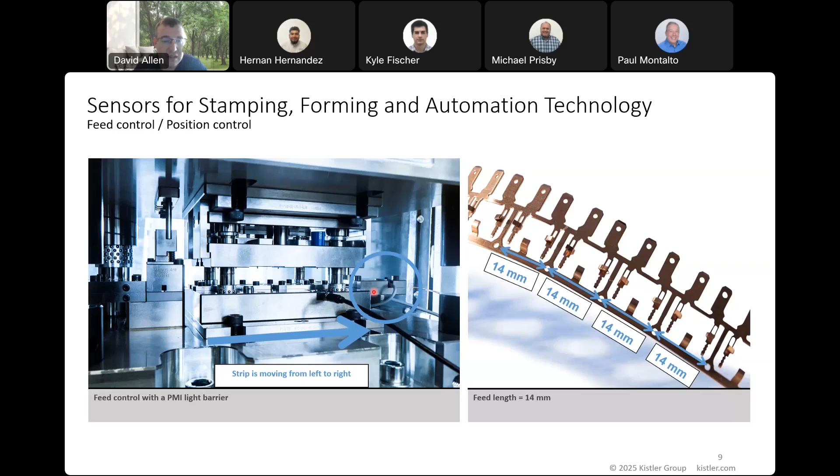Here's an example of a strip moving, in this case left to right. We can see the strip 14 millimeters apart, with some detection holes that we count. Our sensor is here on the exit side, and we're counting these holes as they go through.

Typically they get mounted towards the end, so we get better control and a better idea of what's happening in the process. If there's any misalignment happening inside, that will cause misalignment at the end of the strip as well, alerting us there's a problem. So we can immediately stop the machine and protect the die and equipment.

Our sensors are used a lot in high speed applications. One benefit is that they can do 4,000 samples per second. We'll show you an example on a high speed Bruderer stamping machine doing 2,000 strokes per minute. So let me play this for you.

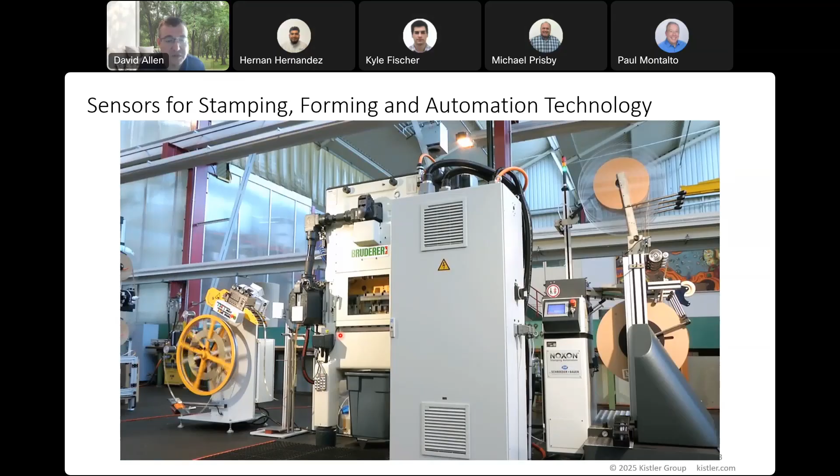Here's the operator starting the machine. We have a loop control sensor detecting this loop as the strip comes off the reel and into the machine. As it comes up to speed, you'll see an example.

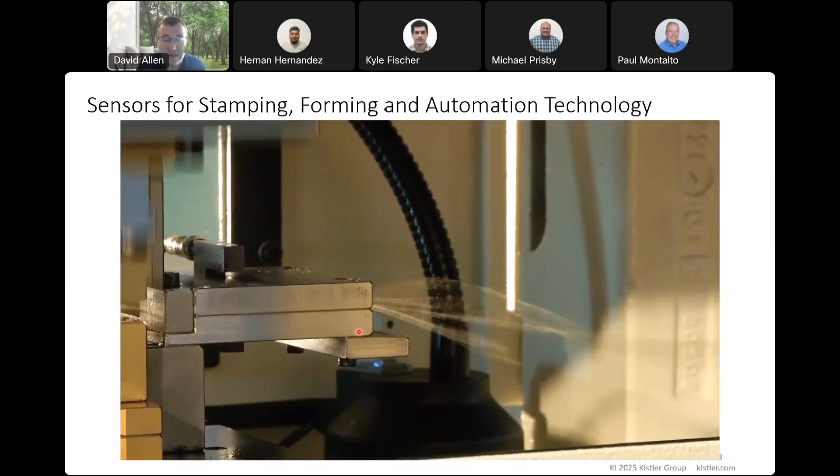We don't have the sound playing to protect your ears at the moment, but it sounds quite impressive as we're hitting the high speeds and the strip is running through the process. Now we're detecting every single time as it's getting positioned, getting lined up, and getting stamped. In just a second you'll see the display showing that we're achieving at least 2,000 strokes per minute, and I think we've even had some machines go faster than that since this video was taken.

So there you go. Additionally, our sensors, I mentioned the ejection control sensors - these are frame barriers. We have a frame that can be put underneath to make sure that a slug is properly ejected. If the slug is not properly ejected, it could be jammed in the die itself in the stamping process, and then as you come down, you could definitely damage the equipment. So we want to make sure you're properly ejecting and that you're clear for the next stamp.

The frame barriers here, we have crisscross versions as well, where the beams are crossed from each other, and we can detect down to less than 1 millimeter slug that would be ejected from the machine.

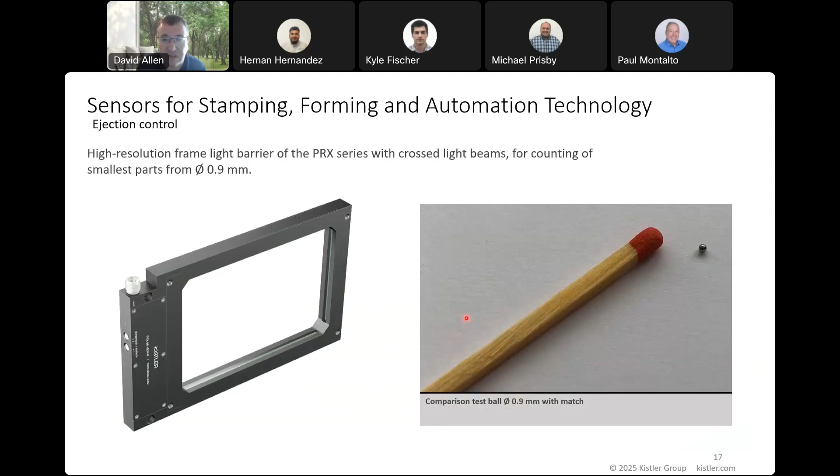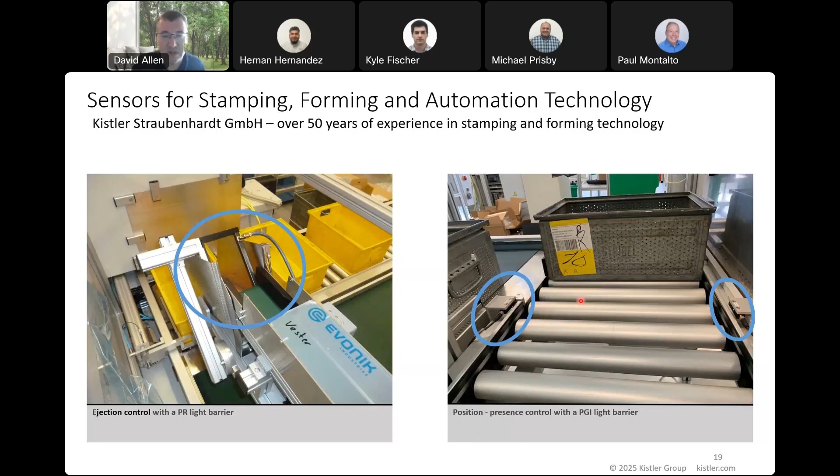Additionally, we can use the ejection frame sensors for counting parts. So if we're filling a bin, if we need to fill a bin to a certain number of parts, we can use this as a part counter, and once the bins are properly filled, then they can move on. We can also use a split light barrier for presence control for those bins to make sure that they're being properly routed afterwards. A wide variety of different applications as well, so it's not just limited to stamping.

So like I said, it's a very robust sensor. It's a very high speed sensor. We can detect very small parts, and we have the ability to keep the lenses clean with the blow-off valves. So that covers that one.

I will switch my hat here for just a second and go over some of the other solutions that we have at Kistler. In addition to those topics that we've covered, we also have sensors that we use for monitoring tool wear, tool breakage in CNC and metal cutting type applications.

Kistler's been around for a long time. We've really done well in the research and development for cutting and machining tools - research and development for CNC machines, CNC tooling, coolant development, that kind of stuff. I'm not going to go into that detail today, but we have that information if you're interested in it, but we're really expanding into the tool monitoring side of things - understanding tool wear, tool breakage, spindle health, that kind of thing.

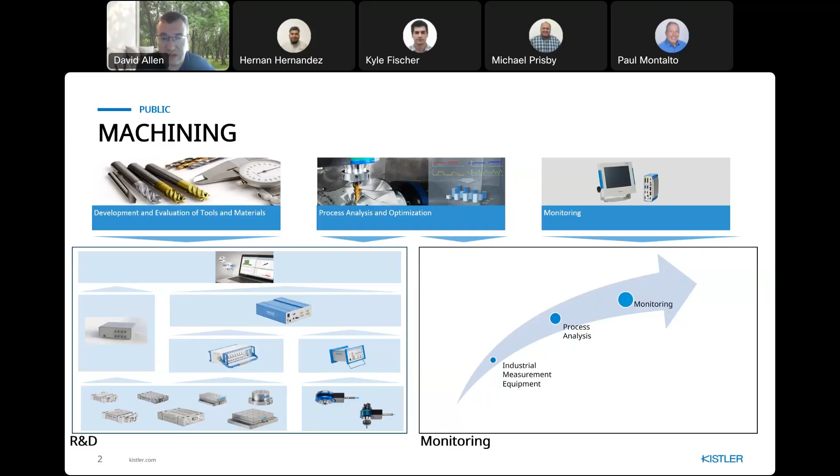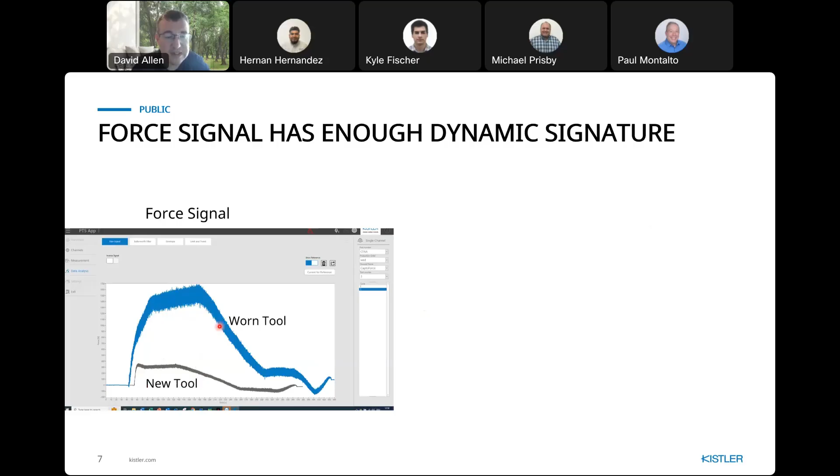So we have a wide variety of different ways of doing this, but here's one of our software solutions where we're looking at a new tool versus a worn tool in the time domain. We can also look at this in the frequency domain and see the types of frequencies, or maybe with a high pass filter being applied to it, a new tool versus worn tool. So it's very quick and easy to identify when tooling is wearing out.

We have lots of different solutions for this. I won't go into all of the details today, but just know that depending on your specific application, there's a wide variety of ways to do this, from software packages and the maXYmos that Kyle covered, to direct communication with the machine PLC.

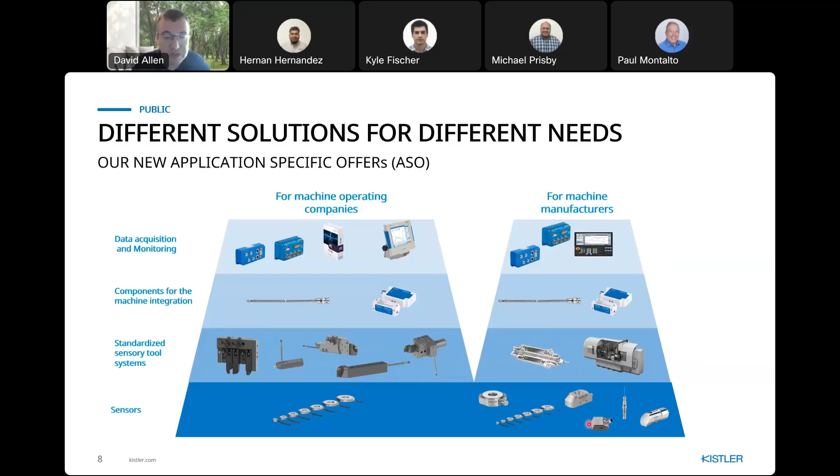We have wired and wireless solutions, instrumented tools, tool holders, or ways to monitor directly on the machine spindle, all the way down to force sensors, strain sensors, vibration sensors, pressure sensors, depending on your specific type of application. We're using some of our standard off-the-shelf sensors and taking them into the maXYmos solution so you can monitor it remote or independently, or into one of our amplifiers to send analog or digital signals into the PLC.

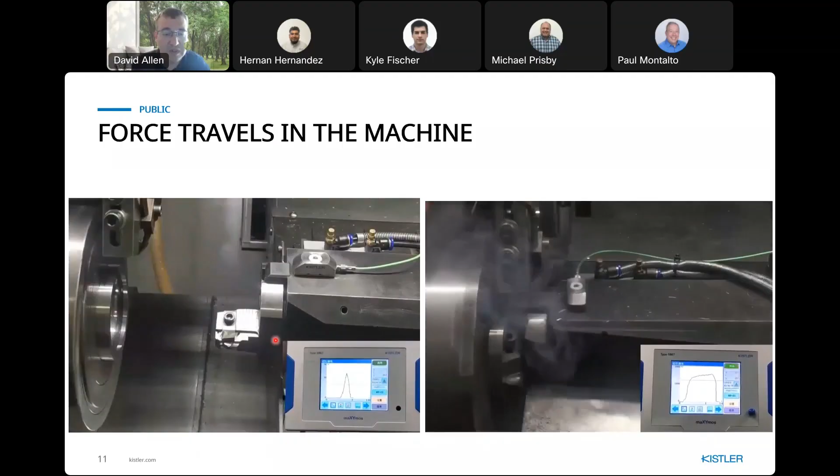It could depend on your specific situation, your setup, where we would mount something and what the best solution would be. What we're noticing is you've got the tool down here, but we're picking up the force up here. So the force is being applied on the tool, but it travels through the structure itself, the rigid, stiff structure, and we're able to pick up that tensile force with a strain sensor in this application.

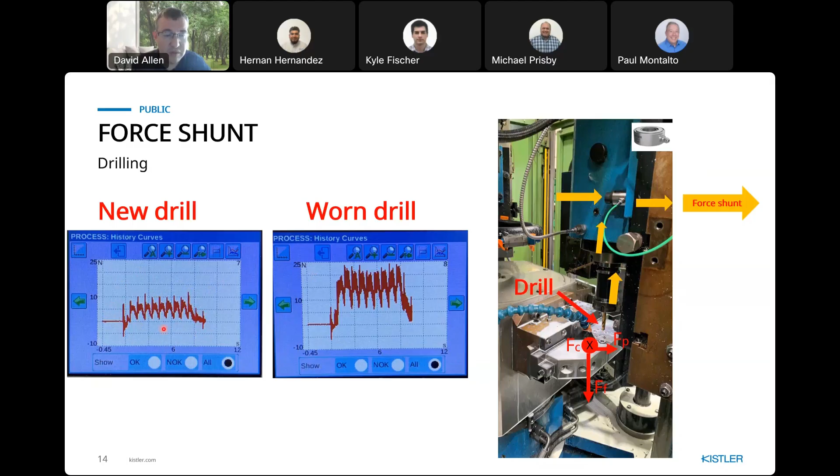Here's an example in a drilling situation where we have a drill coming down and drilling on a part. The force is being applied down here, but it travels up through the structure. The structures themselves are very rigid, and that helps us. The force gets sent through a force washer, like this washer we have up here. But we tightly mount this to the frame itself, and then it's able to pick up those forces from the drill tip itself. So we can see in a maXYmos a new drill and what those forces look like, and a worn drill and what those forces look like.

One more example is in a lathe application. Lathes can be challenging with the rotating turrets and cabling. So what we've done here is, with a dynamometer, removed a bolt on the actual frame itself, the structure itself, and put a slimline force sensor under the bolt. Now we're out of the way of the rotating turret, and we're able to pick up the forces that transverse through the spindle head unit itself.